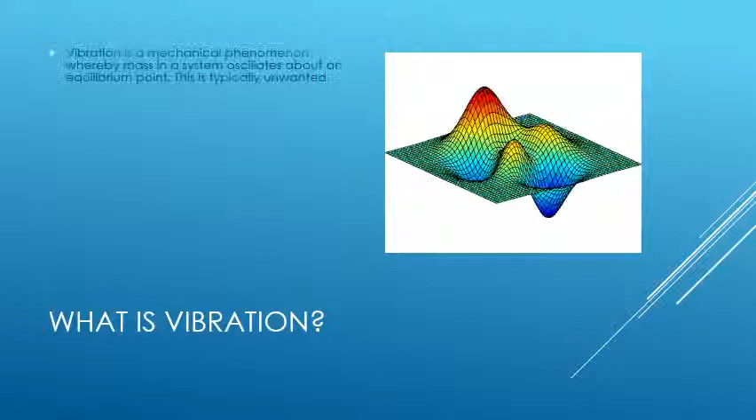So what is vibration? Vibration is basically a mechanical phenomenon whereby a mass in a system oscillates about an equilibrium point.

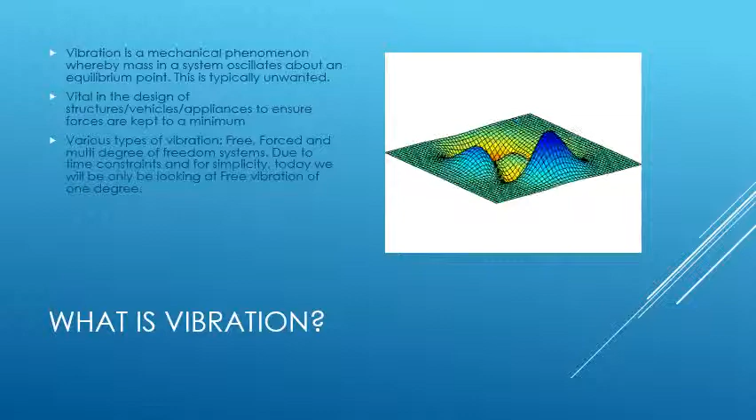Vibration is typically unwanted. Engineers try to design systems to minimize this vibration as much as possible. This is vital in the design of various structures, vehicles, and appliances to ensure forces within the body are kept to a minimum, so that structure, vehicle or appliance does not prematurely fail when in service.

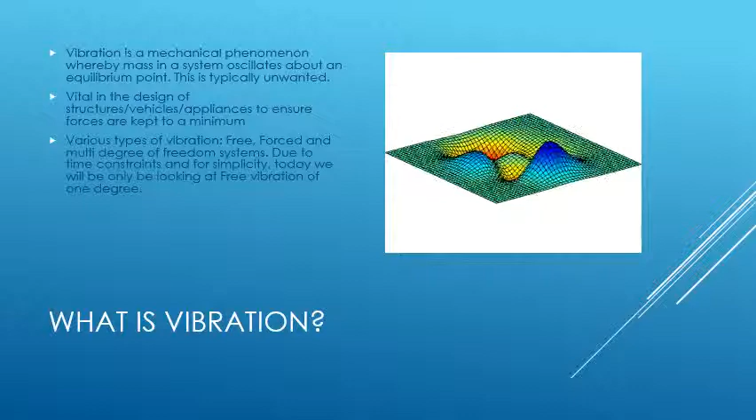There are various types of vibration. We've got free vibration, which we'll be looking at today, forced vibration, and the multi-degree of freedom system vibration, which is basically how all systems work.

Due to time constraints and for simplicity, today we'll only be looking at free vibration of 1 degree with and without damping. All systems where vibration needs to be analysed are very complex, but engineers make it much simpler to analyse them as a basic spring mass damper system.

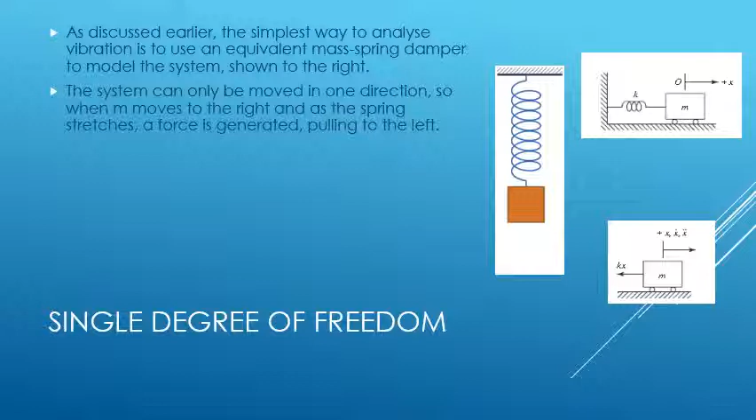In single degree of freedom systems, we basically model the vibration as an equivalent mass, damper and spring system, which can be shown similar to the one on the right, but in this case we're just doing it without dampening, so the system can only be moved in one direction.

So when the mass moves to the right, that stretches the spring, which then in turn imposes a force generated to the left. As we won't be taking damping into account in this instance, the system will oscillate freely forever until imposed on by another force.

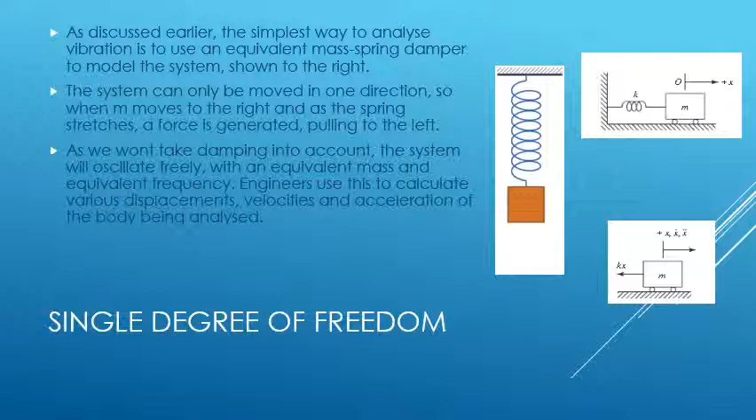That'll have an equivalent mass and equivalent frequency, the natural frequency at which it will vibrate. Engineers use this to calculate various displacements, velocities and accelerations of the body to ultimately work out forces.

In this analysis, the free body diagram can be seen on the right hand side. Then we use Newton's second law in the analysis, so feel free to pause and go through the maths.

Basically we have F equals ma, equal to the spring constant times the displacement. Then when we move that to the other side, we've got a second order differential equation, which we can then solve for x.

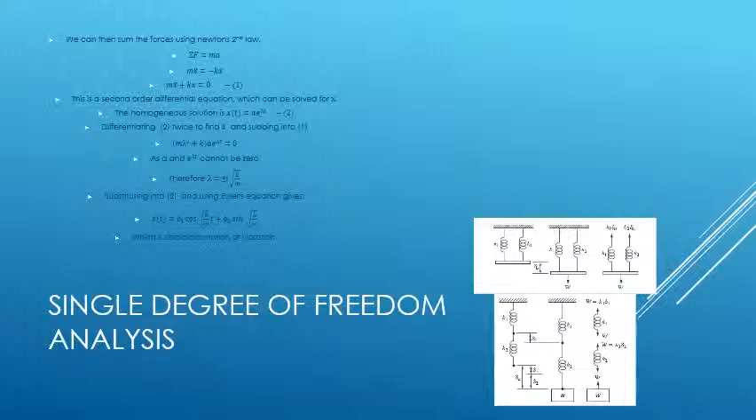That'll have a homogeneous solution, which we can go through, differentiate twice, and substitute back into the first equation. Basically we'll find lambda, then substitute that back into the original equation, and we've got pure sinusoidal motion, which is inevitably what vibration is.

By definition, the natural frequency at which the body will oscillate is given as the square root of the spring constant divided by the mass.

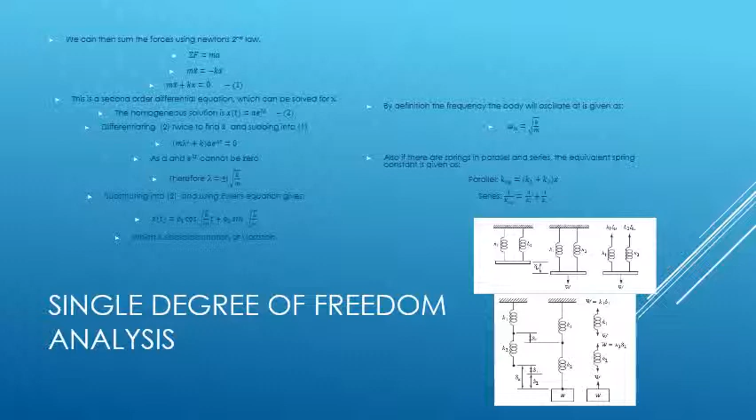If there are more than one spring arranged in either parallel or series, the equivalent spring constant can be figured out. For parallel, we've just got the sum of the two spring constants times the distance the system moves, and in series we've got 1 over the equivalent equal to 1 over the first plus 1 over the second. These can be seen in the pictures below.

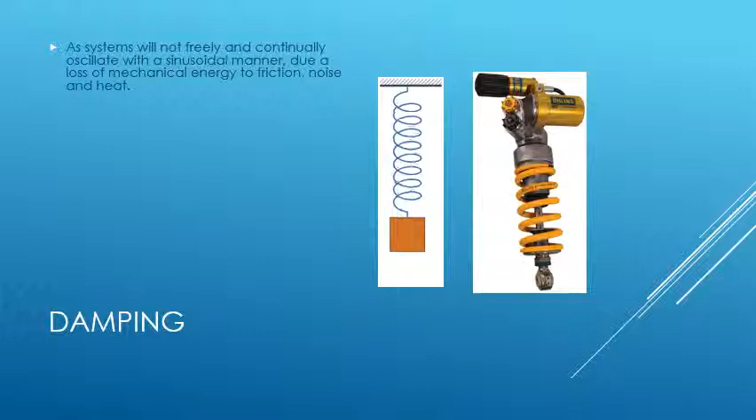In reality, there will never be a system which will continually oscillate in a sinusoidal manner, due to the fact that mechanical energy will be lost from the system, due basically to friction, noise, and heat. This can be shown in a similar animation to the undamped system, shown to the right here.

To model this damping effect, engineers use a viscous damper in the analysis to account for all these losses, and the force due to a viscous damper is given by the relation F equals the damping constant times the velocity. However, this is only an approximation, as viscous damping is easy to analyse, as opposed to the actual damping going on in the system, which is basically dry friction and hysteretic damping.

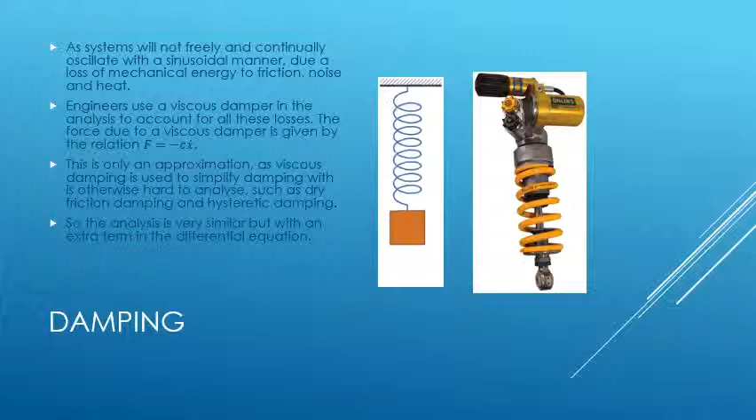The analysis is very similar to the free undamped vibration which we did just before, except there will be an extra term in the differential equation.

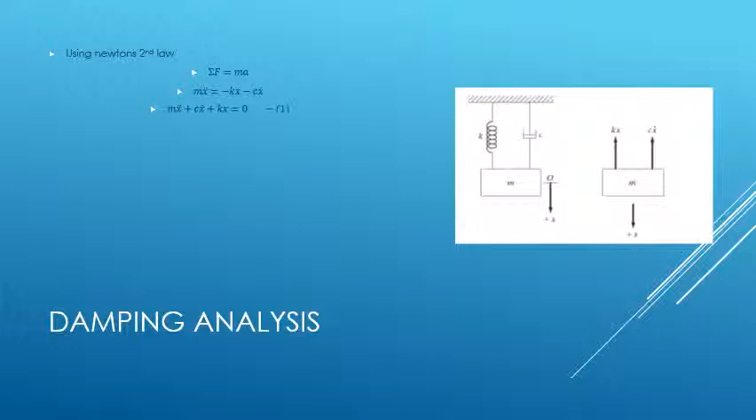So the analysis is very much like we did before. We're using Newton's second law, except we've got that extra viscous damper term. As you can see by the free body diagram, the force will be acting upwards as opposed to the motion, similar to that of the spring force.

So again, we have a second order differential equation which can be solved for x using a similar method to before, so feel free to pause it and go through the maths. We basically find a solution, differentiate it twice, then substitute it back into the original equation.

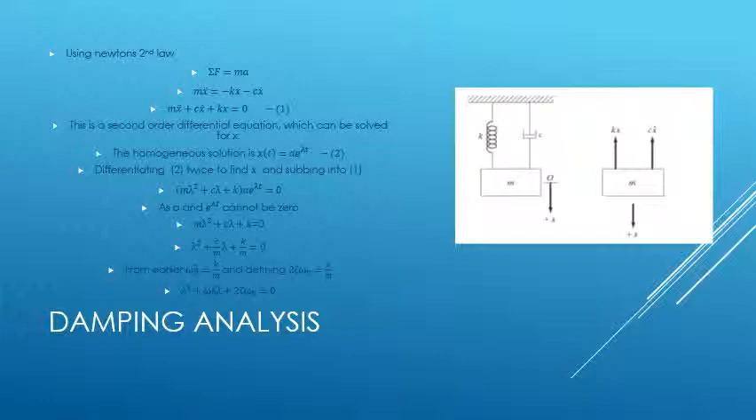To simplify things a bit more, we use the relationship that the natural frequency squared equals the spring constant on mass, and we define a new parameter zeta, where 2 zeta natural frequency equals the damping constant divided by mass. When we substitute all that in, it's a much nicer looking equation.

We can find lambda easily using the quadratic formula.

Now substituting that back into the original equation, we see that the displacement response has both a sinusoidal component and an exponential component. We also define that the damped natural frequency is equal to the natural frequency times the square root of 1 minus zeta squared. Zeta basically determines what type of response the system is.

If zeta is less than 1, we've got an underdamped system, which oscillates and decays. When zeta equals 1, it's critically damped, purely decaying quite quickly. And when zeta is greater than 1, we've got overdamped, which is purely decaying.

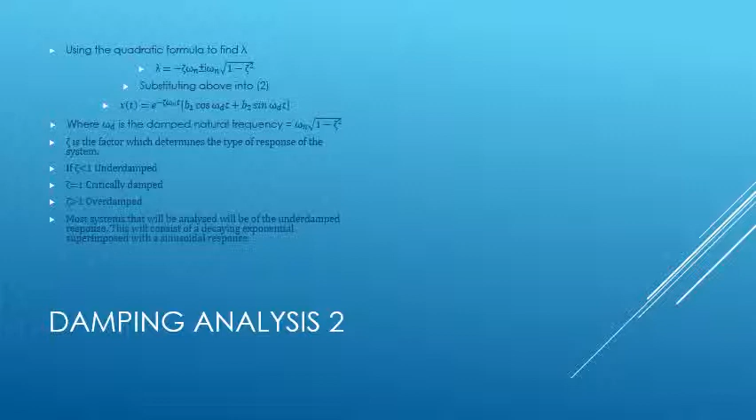In our analysis, we'll mostly be looking at the underdamped response, which has a decaying exponential part to the displacement, superimposed with the sinusoidal response similar to that of the undamped system which we analysed before.

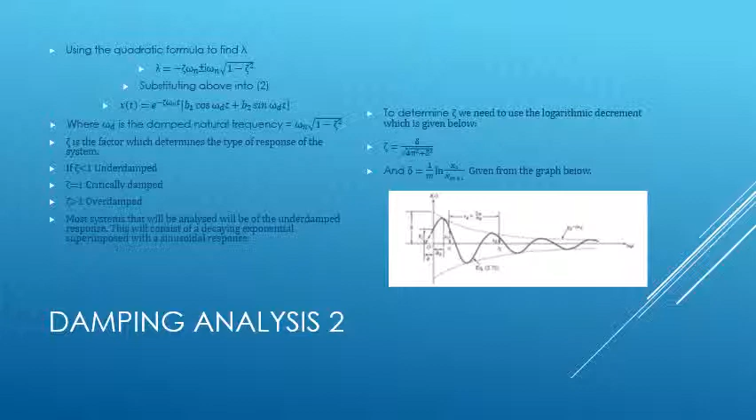So you get the amplitude of a number of peaks and put it into the logarithmic decrement equation, and the more peaks you take, the greater the accuracy of zeta will be.

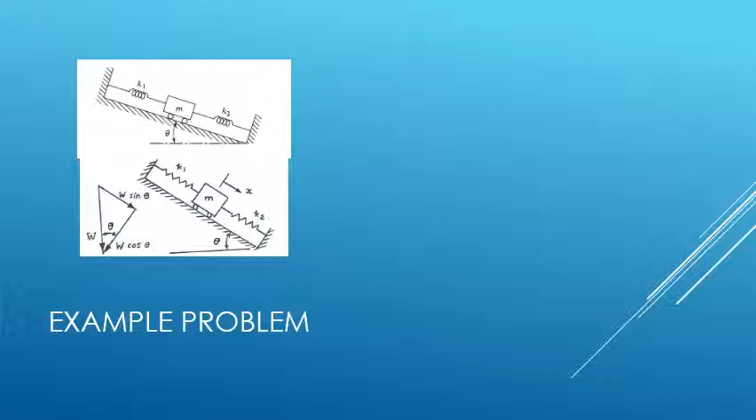That's pretty much all the theory behind the free response of damped and undamped systems. So we'll finish it off with an example.

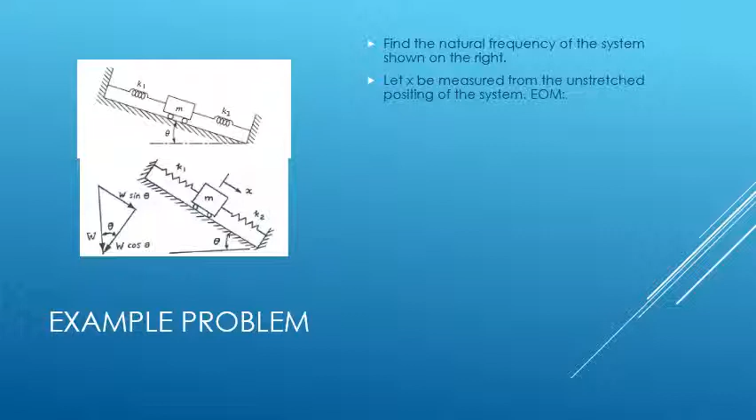In this simple example, the question asks us to find the natural frequency of the system shown in the picture. The free body diagram will look similar to this, just underneath the system.

We'll let x be measured from the unstretched position of the system. So the equation of motion becomes ma equals spring constant 1 times the distance it moves from the unstretched position, minus the second spring constant multiplied by the distance it moves from the unstretched position.

Then because it's on an incline, we have to add the weight force component parallel to the floor, and that w sine theta is going to equal the stretch length times the sum of the two spring constants.

Once we put all that into the first equation, we find that the weight force component cancels out, and all we're left with is ma equals minus (k1 plus k2) times x.

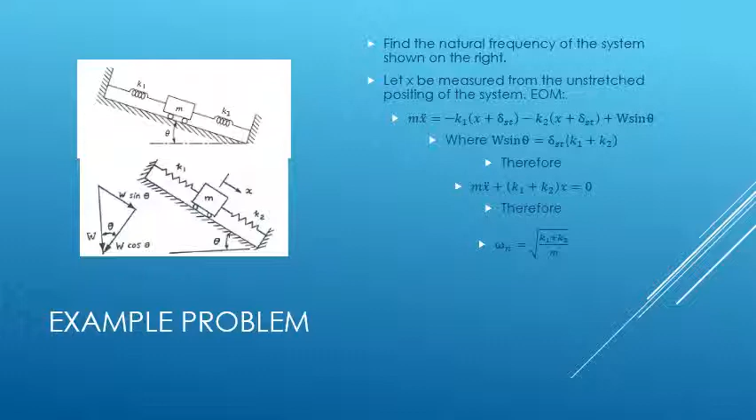Then from the definition of the natural frequency as the square root of k on m, we use the equivalent k, which was k1...